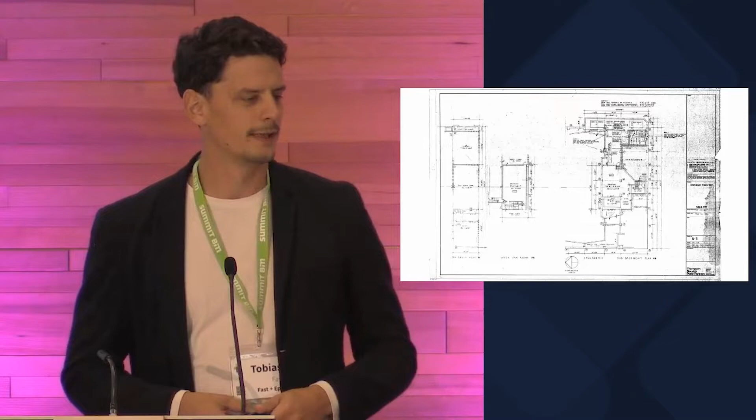We used to design like this, right? So a manual process, hand-drawn, lots of labor, slow, but still an art to it. Drawings and design look like this, right? It's hand-drawn, very simple lines. Please don't make any changes. This took all day. This took all week. This was the process. This is how buildings were designed. This is how the drawings were produced.

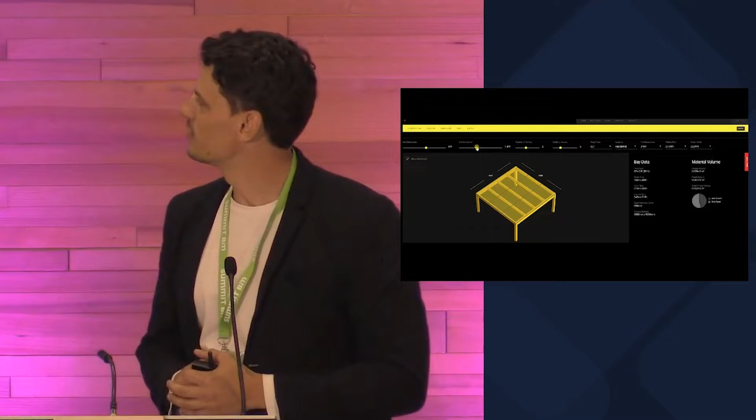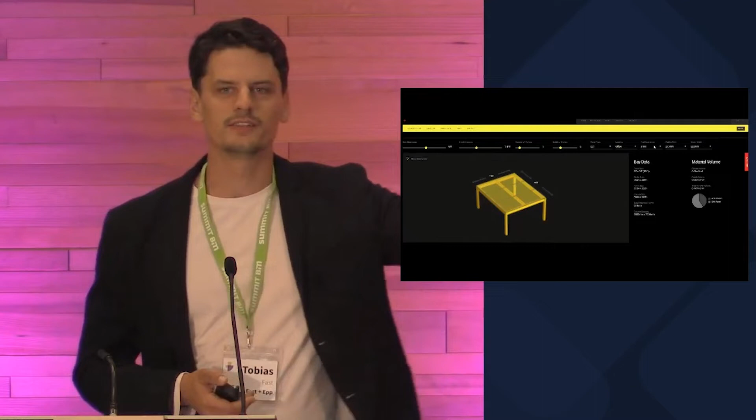So what does design look like today? Well, this is how we can design now. This is how we can do automation and calculation. This is the full parametrification of design. Now we can take those rote manual tasks of calculations, the 20 drafters in a room, and it can all be done in a few clicks, right? This is the dream of consequence-free trial and error.

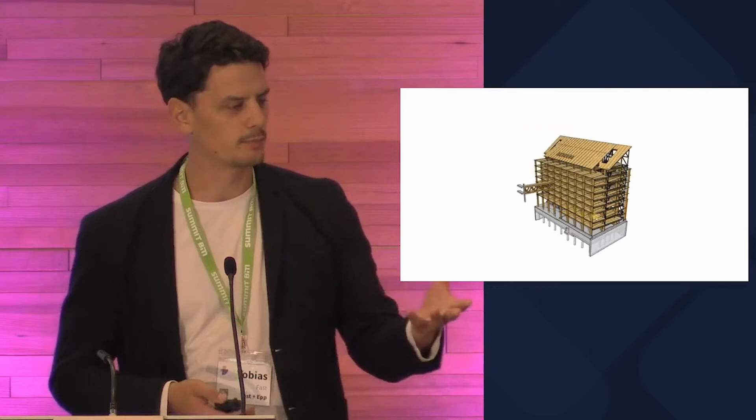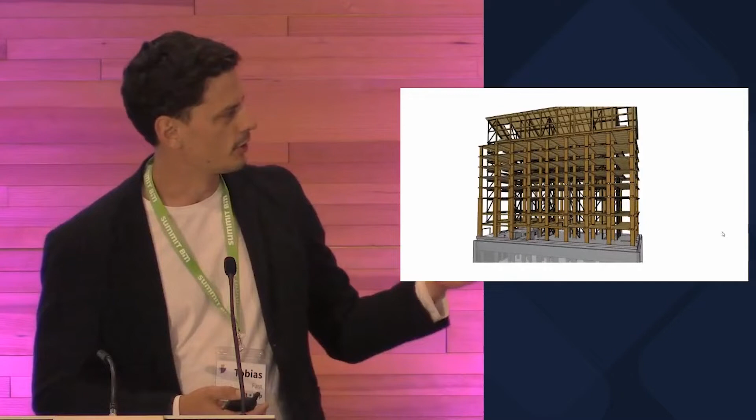This is how we can produce buildings now in terms of the drawing production, in terms of what are the documents a builder needs, what is the content a builder needs to install a building, to construct the structure, right? It's a full 3D model. We've seen this all throughout the day. Full 3D model, interactive. You can do sequencing, time-lapse. Every screw is in there. Every hole is in there. It's all contained in there. It's the full kit needed to know how this building will come to life.

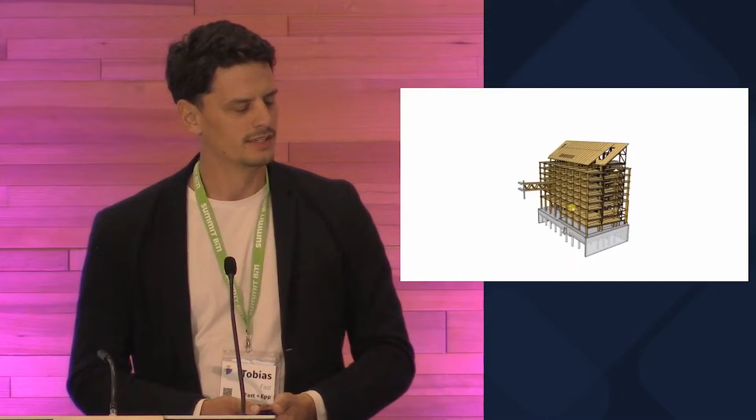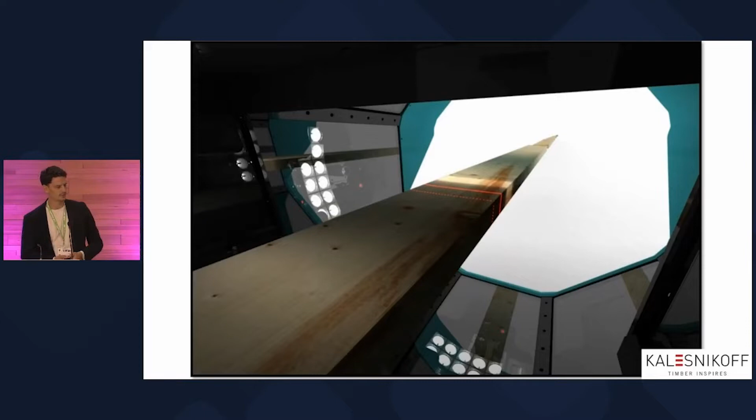This is what we're doing on quality control of the materials that are going into the building. This is Kalesnikoff at their plant out in the Kootenays using laser scanning on all of their boards. There's an AI machine, an imaging machine here that detects knots based on the thousands of board feet that it's received in the past and can then automatically detect knots for the board that it sees now right in front of it. And it can optimize that board to produce maximum yield. So incredible technology.

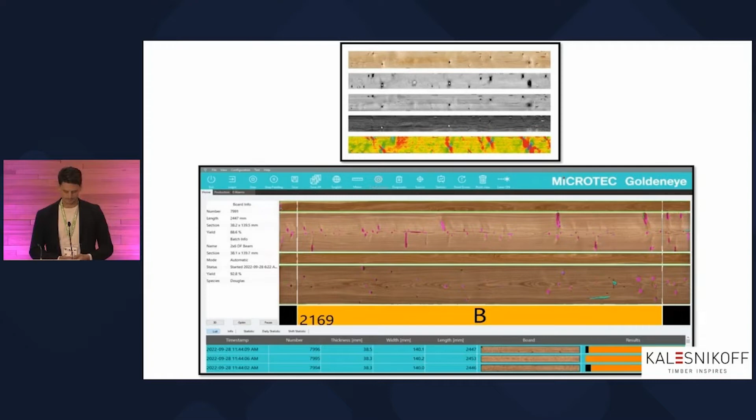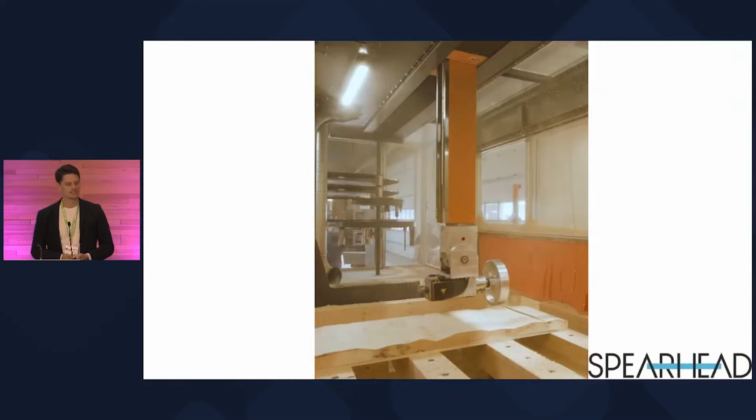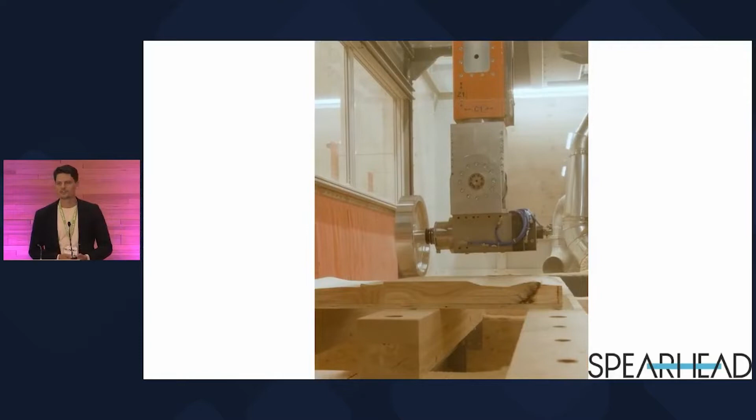This is how we can fabricate now. This is Spearhead just down the road from Kalesnikoff out in the Kootenays. I could watch this forever because it's mesmerizing. But you can create these forms, you can cut these shapes that previously were very difficult. Not impossible, but very difficult, right? So this is the technology that we have now that enables us to do forms that we couldn't do in the past.

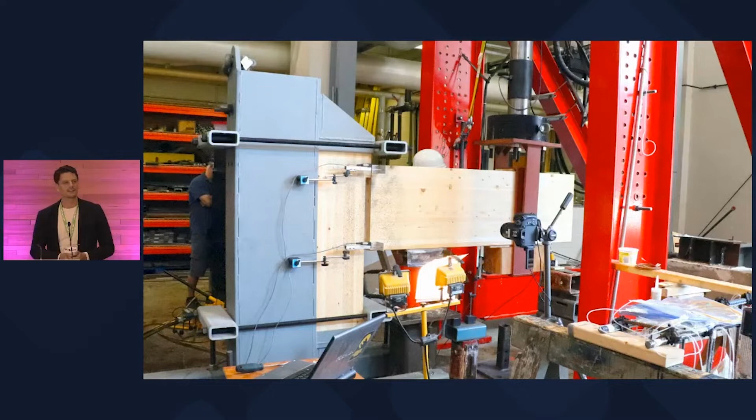We've done a lot of the fire testing. I think we've proven this. We have methods of mitigating fire risk during construction and after construction, so that seems to be fairly settled. Is timber too light? No, well, it is light, and that's a benefit, right? We know there's reduced seismic demand, there's a reduced demand on foundation, so it's actually a benefit in the vast majority of cases.

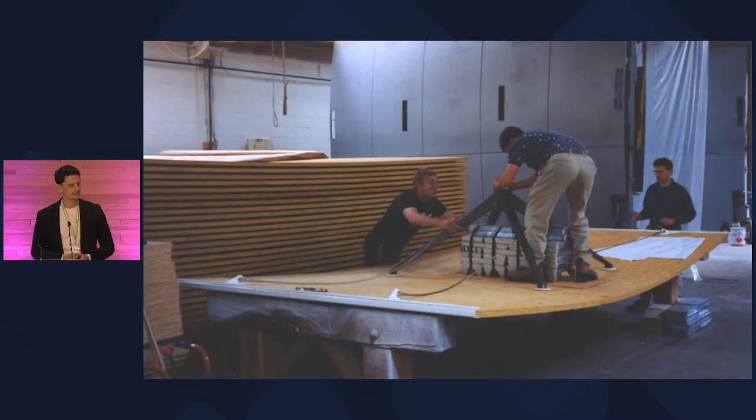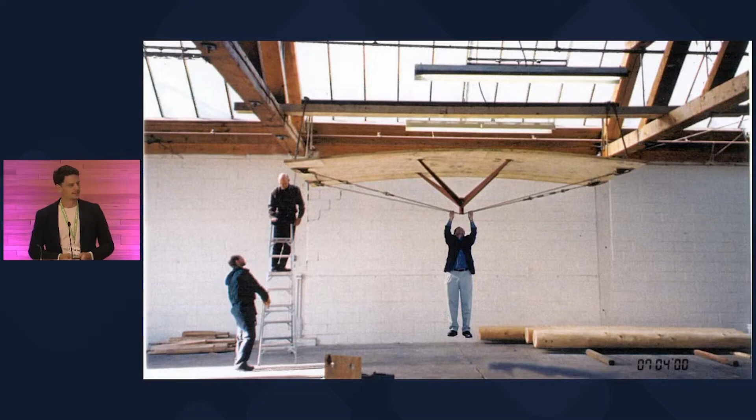Okay, so a history of innovation at Fast Epp. What have we been doing over the years to try and get these buildings going? It's DIY, right? It's men standing on a panel, bending it into shape. There's not a single robot in that photo yet. Maybe one day there will be. But it's this manual process, a history of testing things out. Again, I'll put my father hanging from a panel here just to embarrass him one more time. But this DIY spirit has been there all along for us and many of us in the room. Creates a very simple, elegant panel.

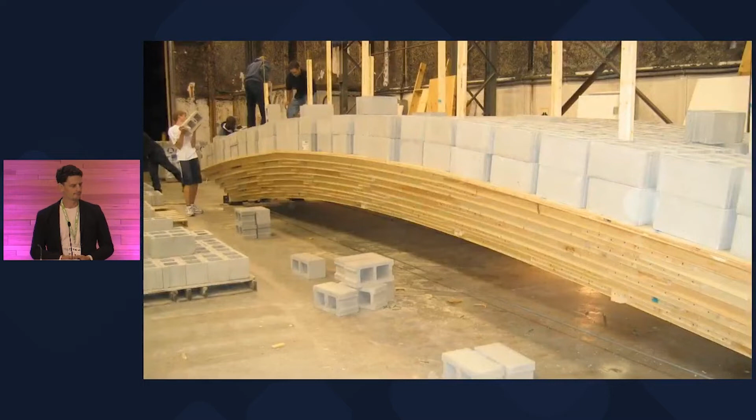Long span panels constructed with just simple 2x4s, pine beetle kill 2x4s, in a way that hadn't been done before, right? This is a 3D space truss, just nail laminated together. But again, the testing and the capacity of the system hadn't been well understood as a new system. And so what do you do? Well, you take some big dumb blocks and you load them up and you see what kind of performance you get from it.

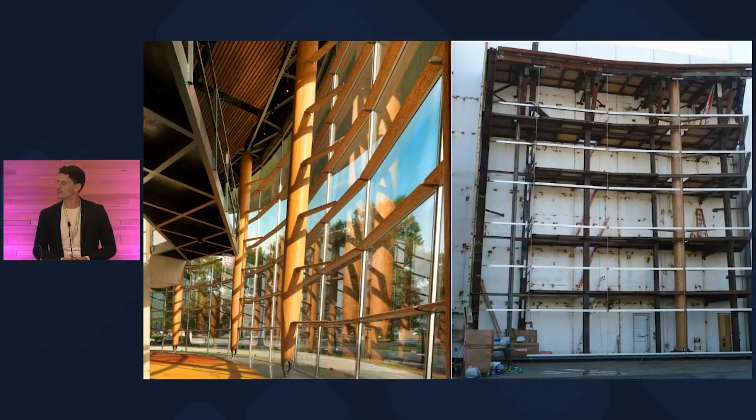A full-scale mock-up of a PSL facade, a multi-story mock-up of a kind of facade system that hadn't been used before. Again, learning by doing, innovating by doing. How much can birch plywood take? It seems a very simple question. It's not in the code. How do we calculate this? Put some weight on it and bend it and try it and feel it and see how it works.

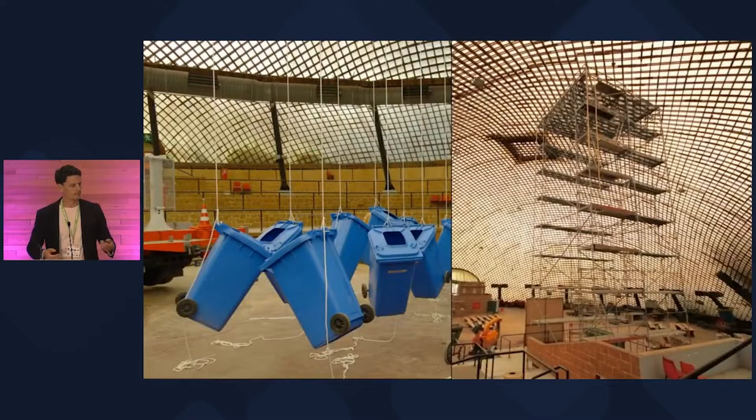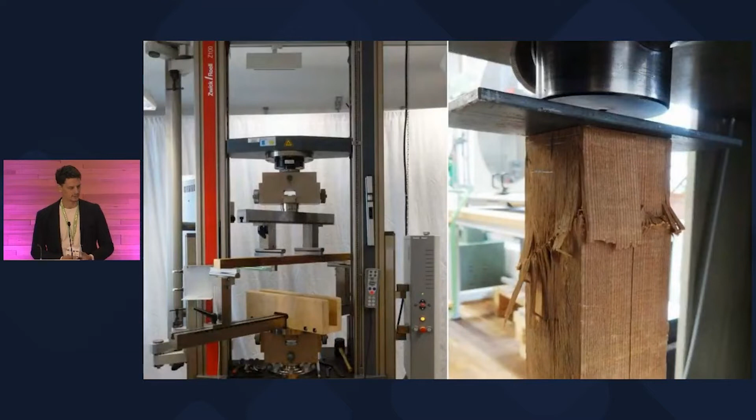The Mannheim Multihalle, this gorgeous piece of architecture, of engineering, is falling apart. It's broken. How do we treat that? Well, let's hang some weights from it. Let's see how much more it can take. And let's figure out the pinch points and figure out a solution to retrofit it. Test out the materials. See what capacity they have, see where we need to add capacity, see where we can reduce capacity. Return it to its former glory.

Glued-in rod testing, this is now becoming a bit more standard. But back in the day, the capacities and the engineering calculations to be able to rely on these structures were not there. And so, again, our friends the cinder blocks come in and you hang something and see how long it takes for that rod to pull out.

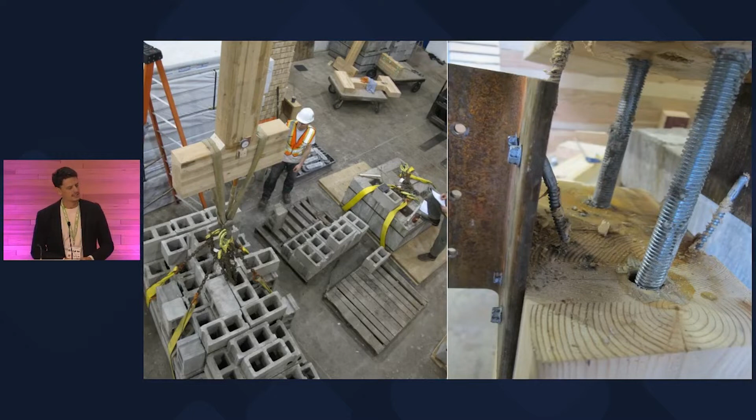To do something like Brock Commons, an 18-story tower, the first mass timber tower of that kind of scale, relied not only on that scale, but also on a system that hadn't been used much more than small canopies, so a point-supported system, right? So just a post-on-panel system. It takes some innovation. At the end of the day, this is a project that needs to pencil out the same as a concrete building, but do it in timber and do it faster and do it in a system that hadn't been done before.

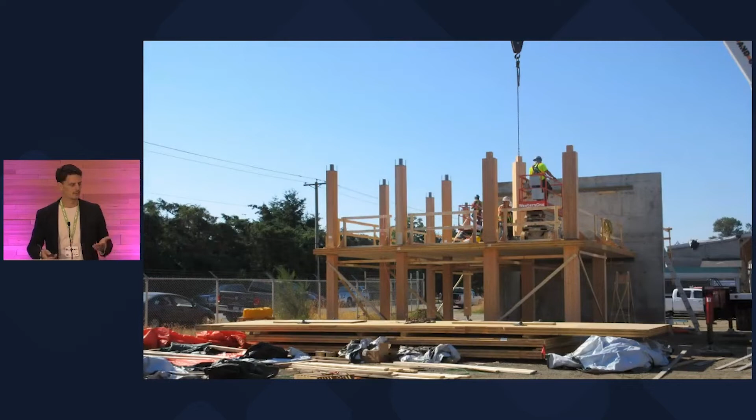So you need some innovation. You need some innovation to inspire, but then to reduce the cost as well. Do a full mock-up and see what it looks like, see if it works. Try one connection, try the other connection. Which one is faster? Which one enables you to get that building built to what it was, which is fairly competitive against concrete and built in a fraction of the time?

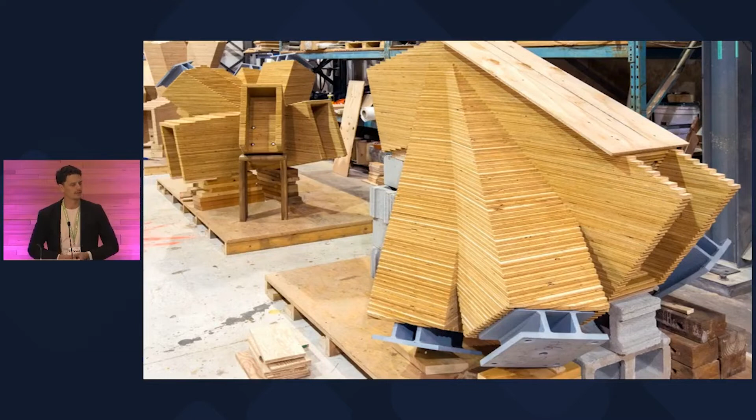Put again a bunch of plywood. How does plywood look when it's all assembled together, a mass plywood node, taking forces from a large museum structure? What is that going to look like? How are the forces going to work in there? Doing it manually is how we've always done it, and working now towards the digital age, which we'll see right away. These long spaghetti noodles out in Surrey look very bouncy, and they were very bouncy.

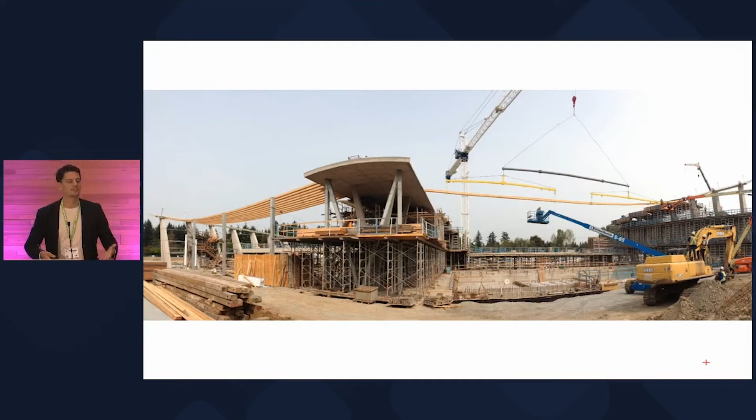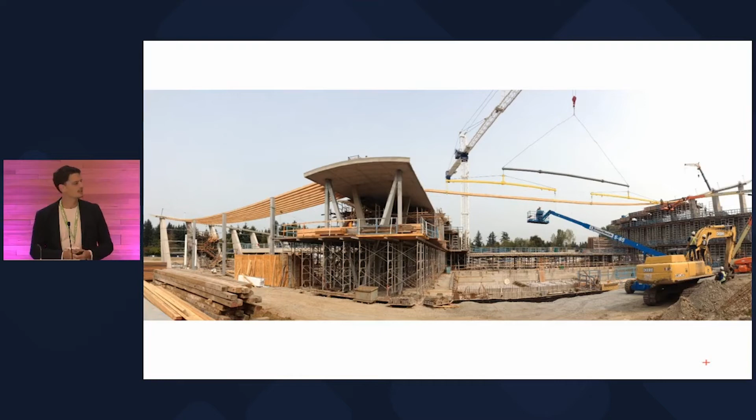But how do you know? Well, you go up there and you test them and you jump on them. And as engineers, like many of you in the room, it's one thing to see it on a machine, to see it on the model, but what is it going to feel like when you're on it? Is that too much? Is that too little? This sort of tactile, interactive experience is so critical to calibrate your model. The model's right analytically, but are there other factors that we're not considering?

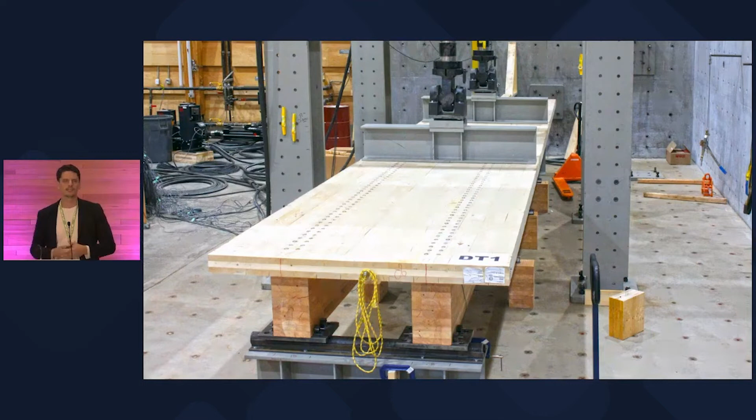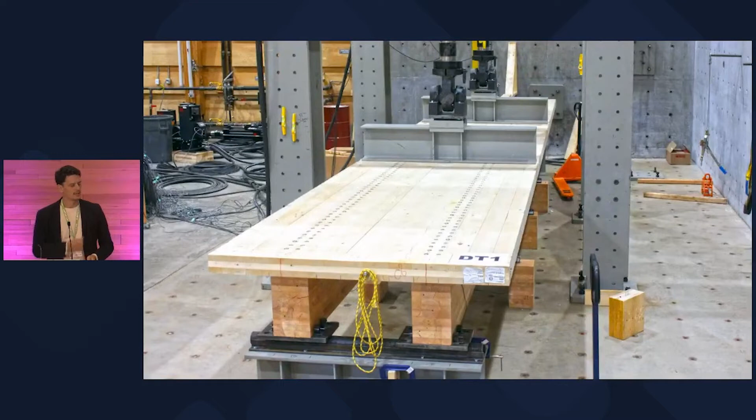And now it's got into much more hardcore testing to push this mass timber into longer spans and more common building applications. The previous ones were innovation to inspire, to do beautiful structures, and now we're looking at innovation to reduce cost, right? How can we do these common building forms in a more economical way? So put a bunch of screws into these beams and test the long span panels for a gym application in Kitsilano.

It's got into the lateral systems, right? Using wood as a lateral element in shear wall applications here in British Columbia, where we have this high seismic region. What is the capacity of these panels? They have great strength, but they don't have very good ductility, right? They're going to break, they're brittle. And so how do we develop new connections? Well, work with the universities and do instrumentation and testing that enables you to do new and novel types of connections to dissipate energy.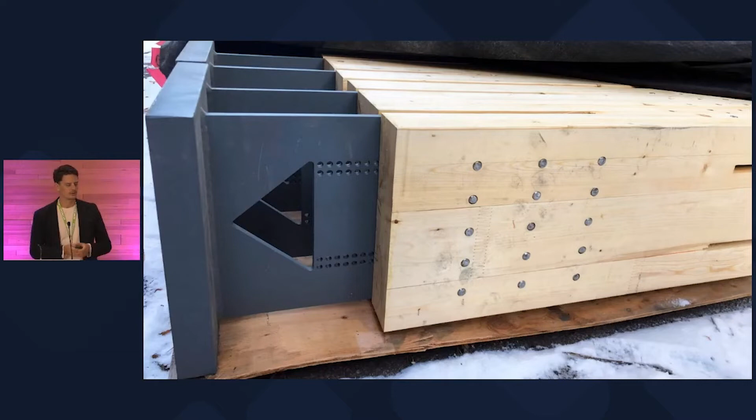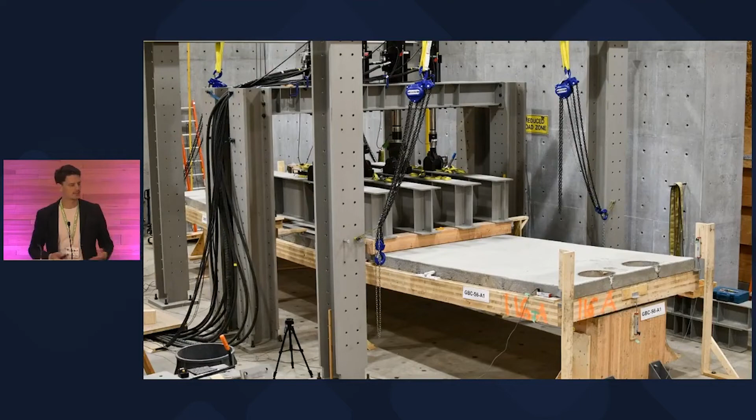This is a perforated panel where the yielding happens in those little holes, and so you're tuning those holes in terms of the size and the spacing in order to get just the right amount of slip and energy dissipation at the base. Similar thing here in Alberta. Okay, and the spans get longer. There's 9-meter spans now. Use concrete where concrete is good, in the compression block up top. And all driving towards this simplicity.

So there's innovation for inspiration, now innovation for cost reduction, to make things simpler, easier to construct, right? Everyone in the room has been talking about how we get it done at a similar cost, quicker and more efficiently. A simple little L bracket with a couple screws hanging onto the beam, and it goes quick, it goes fast, and people are happy. And in the end, you end up with spaces that are inspiring and beautiful to live in and beautiful to work in.

Okay, so it takes an investment, though. Innovation isn't just free, right? Very few people will pay you to just innovate if there's not an end result there. So it takes an investment. So for Fast + Epp, it's been an investment which we've called our concept lab. We did all that DIY stuff that I showed in the past on our own dime and in a yard somewhere in Surrey. But how can we have a physical manifestation of that space so that it's brought right into the engineering factory where we work and where we design?

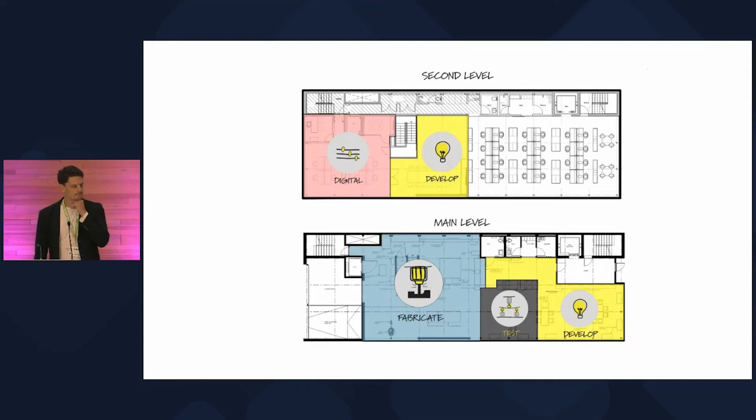So it's in the base of our building, just over in Mount Pleasant, 1.5 floors of R&D space. We've got 4 main functions in that space. There's develop, so coming to the table with ideas. How do we get together to make a new connection? What is the driver in why this building is not going to be built? What is the problem we're trying to solve? What's the nut we're trying to crack?

Fabricate: let's build it, let's assemble it, let's prototype it, test it, break it, do all those things that I showed before about proving the capacity, and how do we do that in a digital way? What is the digital element to all of this that will enable us to do this quicker, faster, and better than we could before?

Our development space, just some inspirational trinkets of what's out there and what's been done before. What are the CLT blocks? What do they used to look like? What do they look like now? What are rebar couplers used for? How can we use a rebar coupler in a wood building, perhaps? And just some space, this is our development hub, to just generate ideas.

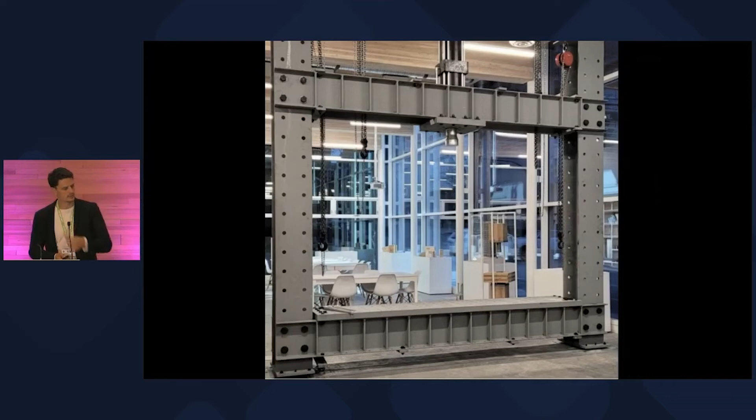Fabrication with woodworking and metal fabrication, a testing frame to allow the engineers to do all the testing required to prove out those capacities that we need to know, and the digital space. Just some little projects that we've been working on. We have a master carpenter on our staff building these gorgeous tables, and seeing that hand in hand with an engineering company has been quite rare, and it's been quite a nice sort of twist on coming to work.

You're used to seeing everyone come to work and go to the computer, but now for us anyway, there's many fabricators and other suppliers in the room that are used to this sort of office and workshop environment. But for us, having these different people with different skill sets, digital, fabrication, robotics, is a very inspiring thing, and it really generates new ideas and shows how craftsmanship can feed into our engineering design to create new buildings.

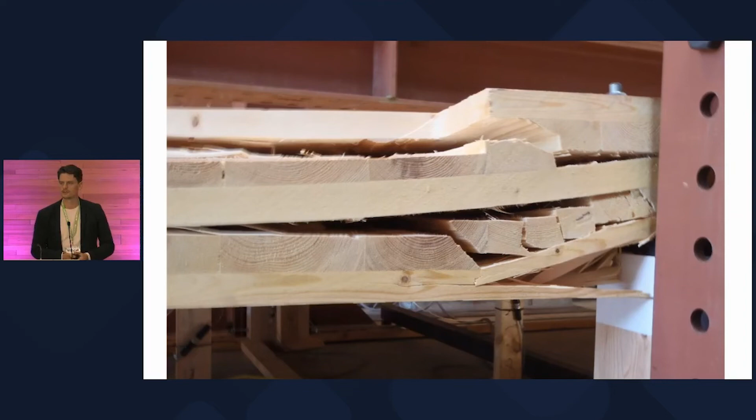The punching shear testing, we'll be doing a large program of about 200 to 300 panels, breaking those panels in that frame that I showed. And again, this is to enable this point-supported CLT construction typology that is becoming much more common, and which will enable really a lot of multi-unit residential construction to go on, and several of these projects in the book. So a big testing program happening this fall to determine the out-of-plane shear capacity of those panels.

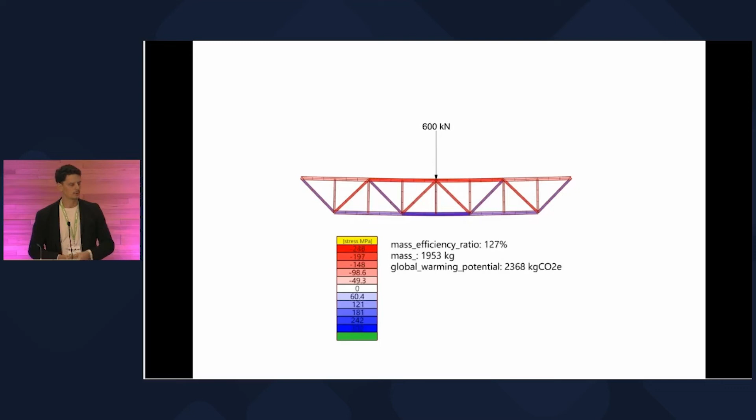Creating digital tools. How do we optimize a truss, which looks about 4 inches wide on paper, but in reality is going to be 1 story high and about 100 feet long? If you can optimize that thing by even 5% by changing every different element, is that worth it from the fabrication perspective? Putting that into a digital engine and making that optimized for any kind of loading condition, it's things that we work on.

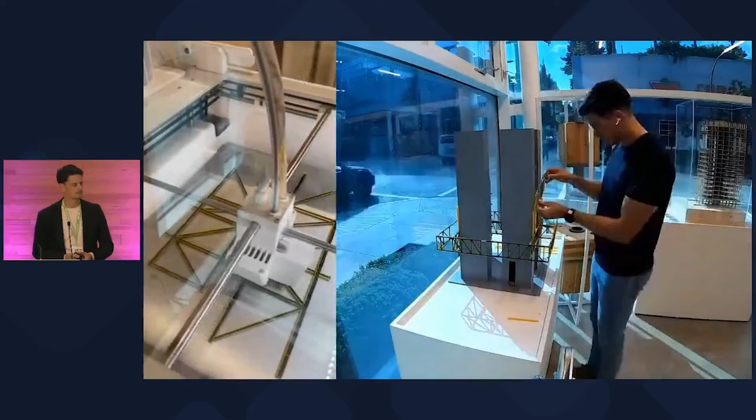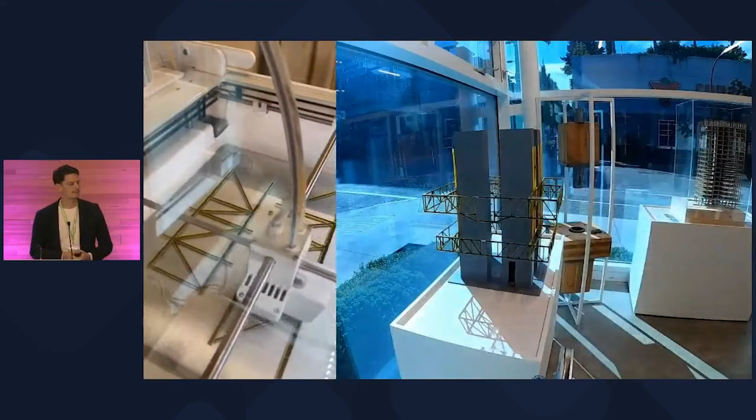3D printing, again, this isn't the scale of some of the other fabrication we've seen in the room, but this is us just taking our first step at this innovation and this investment, providing that value add of what do we creatively bring to the table? How can the physical world and the digital world collide in order to do design better, to give us a better understanding of how these structures behave?

This is a Vancouver Art Gallery project, which will be going up hopefully soon, but a very complex load path, and these trusses that hang off of other trusses that are supported off of different cores, a very complex system. And so to print it, and then to put it together by hand, is a very useful and beneficial process, and that allows us to design in a better way.

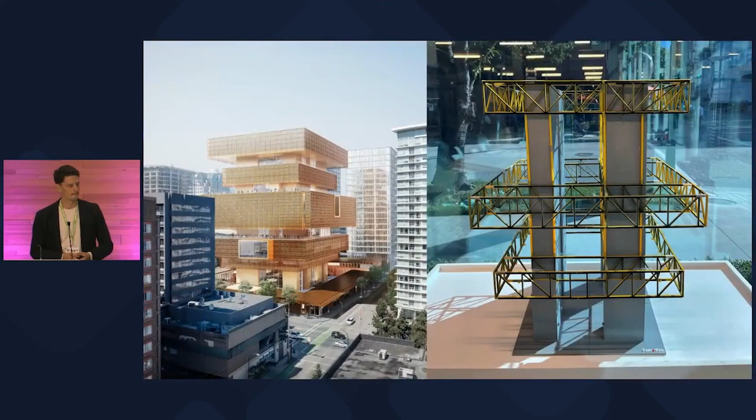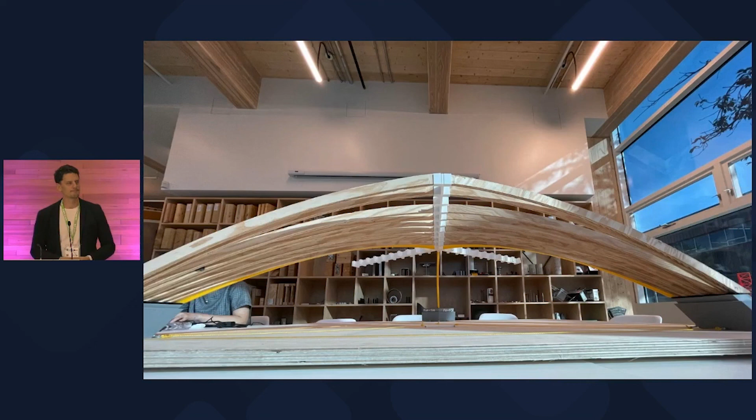And for us right now, it's starting with just simple model making. So little buildings, little arch buildings, and that will be produced on a much larger scale, obviously. But that's our sort of initial foray into this investment that allows us to try and design buildings in a newer way and hopefully a more efficient way.